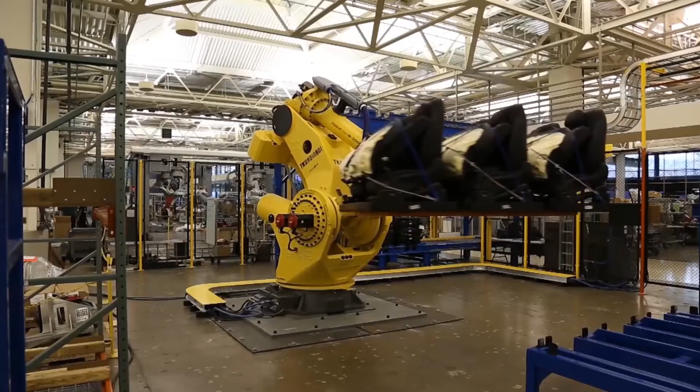As an undergraduate, I took some excellent classes. Here are some of the most memorable ones. Data structures was a very rigorous and very rewarding programming course in C++. Fields and waves used Maxwell's equations to explain transmission lines, waves, and magnetic circuits. Signals and systems got me thinking about signals using frequency and gave me a first taste of systems theory. Robotics 1 involved modeling and control of robots, including arms.

Getting my degree in ECSE means that I gained multidisciplinary skills, worked on cutting-edge technologies, developed a deep, bottom-up understanding of the field, practiced making connections between topics, and used cool math to solve real problems.

One aspect somewhat unique to Rensselaer's undergrad program is the amount of exposure you get to internships and research. For example, I spent 8 months at a co-op with Draper in Boston, and I conducted research at Rensselaer in wearable and autonomous systems for health monitoring applications. These experiences taught me a lot, confirmed how useful every single one of my classes was, helped me focus on what topics I still needed to learn, and helped me decide I wanted to go to grad school.

Throughout my undergraduate career, I was able to spend time with friends not only here on our gorgeous campus, but also going downtown to the shops and affordable, delicious food, or even going to parks. Recently, I've continued to enjoy our city and campus by going to the farmers market Saturday mornings, going to Monday Night Jazz downtown, and participating in Rensselaer's Cheese Club.

Now that I'm a grad student, I continue to take excellent classes like computer vision and optimal control theory. And I spend most of my time on a manufacturing research project with the United Technologies Research Center. It's a great example of cool research that comes from Rensselaer's excellent industry connections.

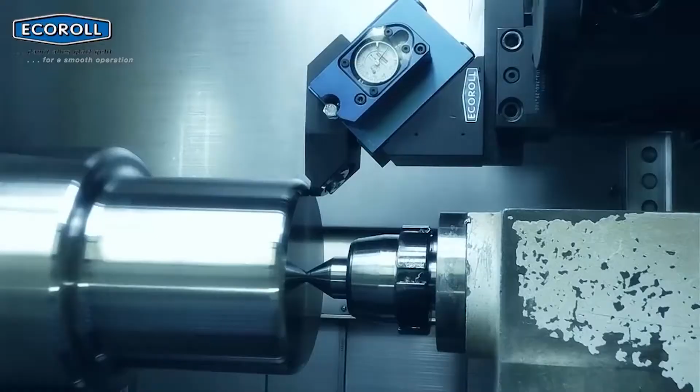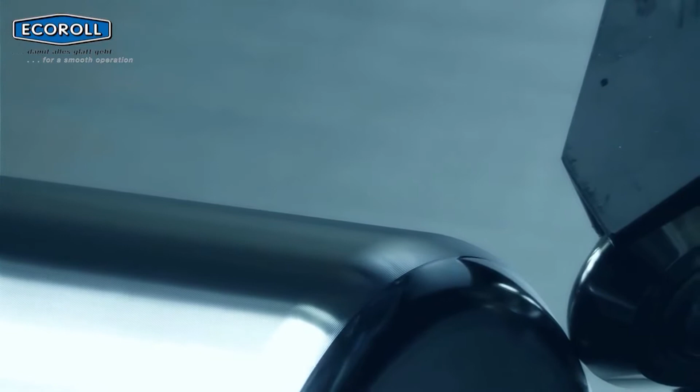The goal of this project is to improve the manufacturing process called deep rolling, where a roller applies high pressure to the surface of a metal part. This pressure causes deformation and residual compression in the surface layer, which not only smooths and hardens the part, but also prevents cracks from forming or propagating.

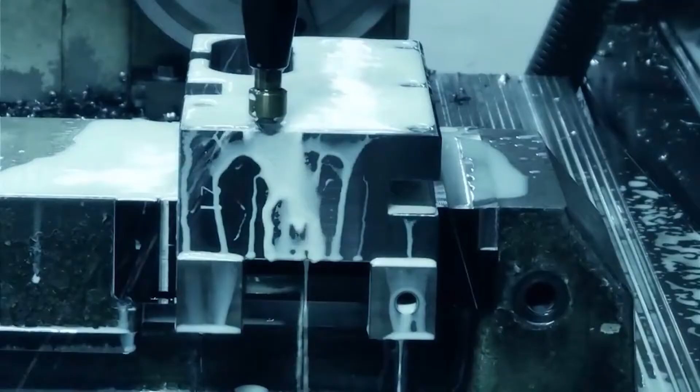This process has been typically done using CNC machines like lathes or tables. These machines are expensive and can't easily work on very large or complicated parts. The goal of my research project is to instead roll on the part using an industrial robotic arm, like one that might be used to assemble cars. These robots are cheaper, more flexible, and have larger workspaces than CNC machines, but they are also less stiff, which makes them difficult to control.

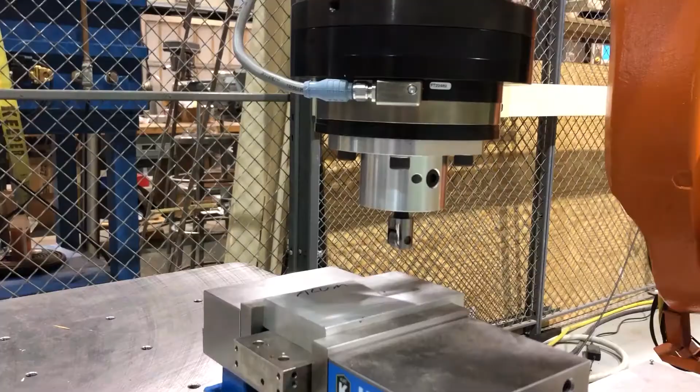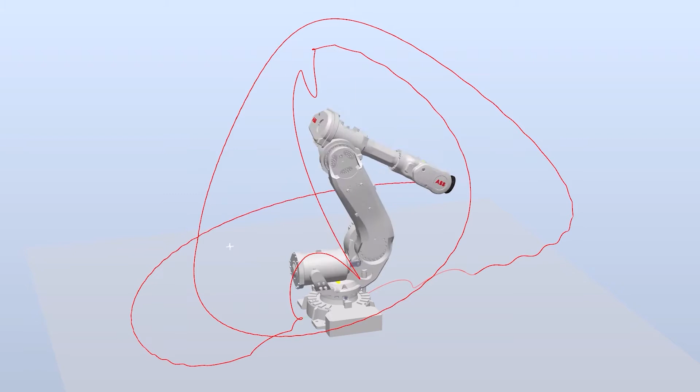That means we need to develop advanced control algorithms which incorporate accurate models of both the robot and the metal workpiece. My focus has been on developing these models. The robot model tells us the relationship between the torque we apply to each joint and the movement of the robot. To find this relationship, I made a gray box model of what this relationship should look like in terms of unknown parameters like joint mass or location of center of gravity. Then, I used experimental data to find these unknown parameters.

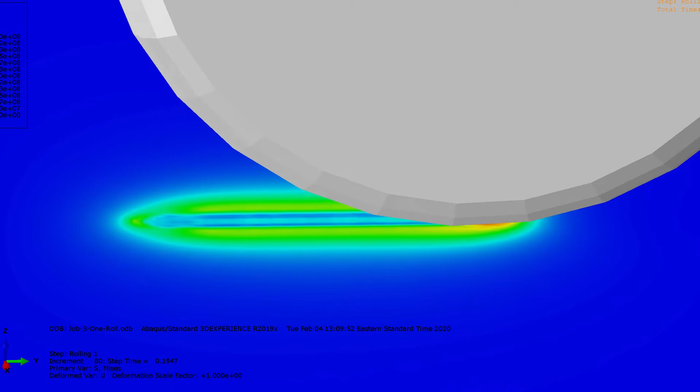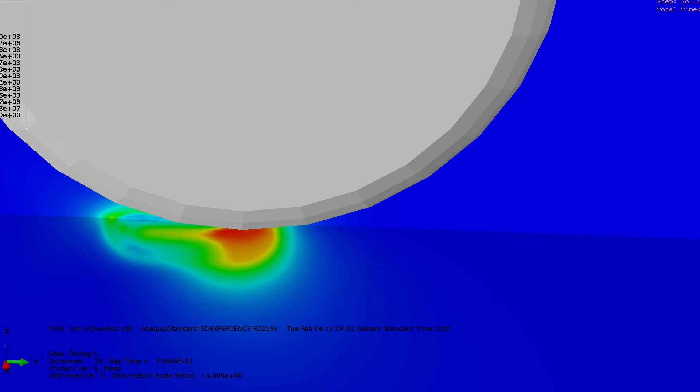For the model of the metal workpiece, we actually already have a finite element model which accurately shows us what happens when we apply pressure to the metal surface. However, this model is highly computationally intensive and requires a supercomputer to run in a reasonable amount of time. My goal is to tremendously simplify the model to give us very similar results, but with much less computation. We can do this by reducing the number of degrees of freedom and converting from 3 spatial dimensions to just 2 spatial dimensions, and by using data from the original model to find viscous, elastic, and plastic parameters.

Making this deep rolling model is very exciting because, as far as we know, no one has done something like this before. I'm looking forward to seeing how much faster we can make the model run while still giving similar results. So, even though this project has so many mechanical aspects to it, I'm still using a lot from what I learned in my undergraduate degree. In fact, coming from electrical engineering gives a really fresh perspective on all these niche problems, and I'm so excited to see where my graduate degree takes me next.